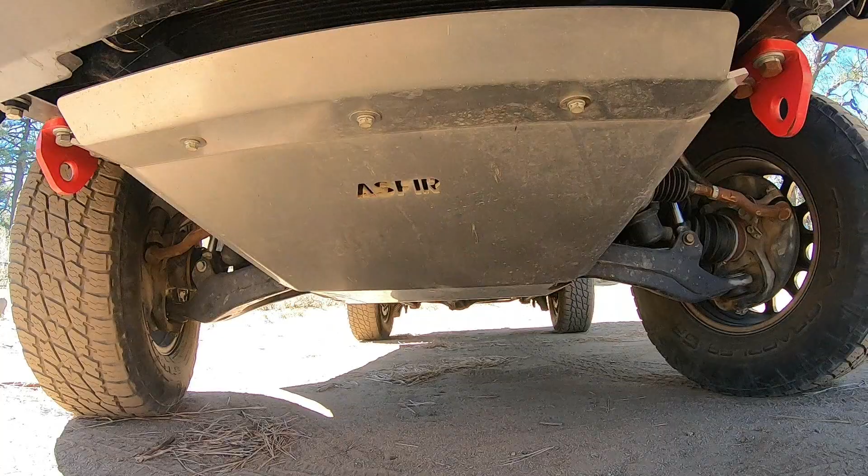We're going to be talking about Asfir. In one of my previous videos, I introduced to you the Asfir skid plate that covers the very front of the vehicle, right from the very front bumper to about where the diff drop is at. And that right there replaces that flimsy fiberglass/plastic skid plate, and it replaced it with a nice 1/4 inch thick aluminum plate with all the proper bends.

So today we're going to install and do a little review on the Asfir gas tank skid plate for the LX470. Now, I know right now, if you're watching this video, you're wondering, hey, is this also going to fit the 100 series Land Cruiser or the Toyota brand? And right now, I don't know. You'll have to check on their website often. I know that they have a prototype in the works, but this one was fitted to a Lexus LX470.

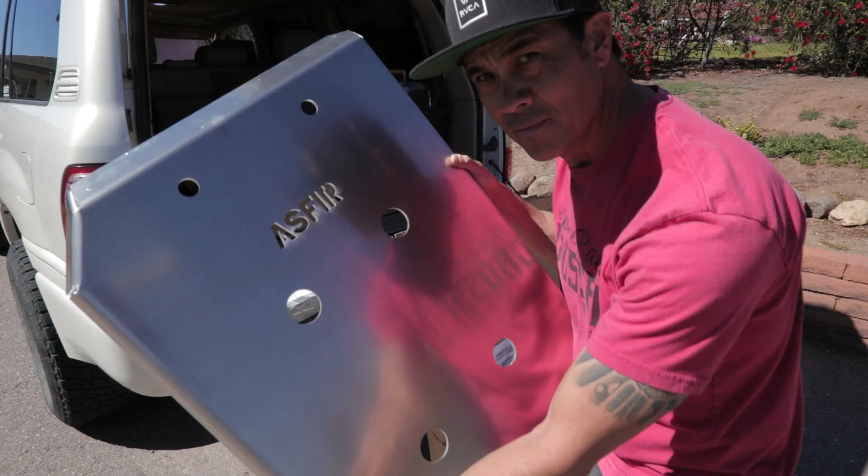Let me show you what came in the box. So what came in the box is some of the boring stuff. Sticker, although I'm pretty excited about the sticker. And then of course, instructions and hardware. Now, the skid plate has all the proper holes for mounting, all the proper bends to fit your LX470 gas tank. Now on the product list you have three different types of spacer nuts, and then you have some pocket washers and bolts.

Now this plate right here is also made out of 1/4 inch aluminum. It weighs 22 pounds, and the instructions will give you all the specs on size as well as where to put those spacer nuts. So let's crawl underneath there and take a look at what we have right now.

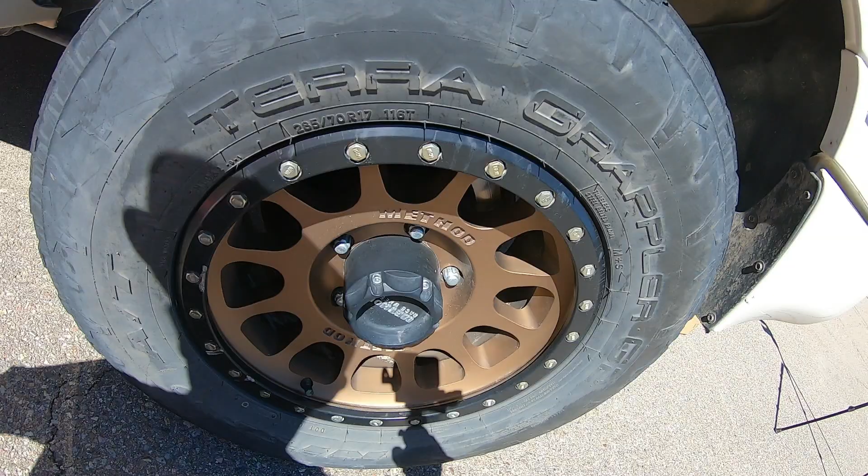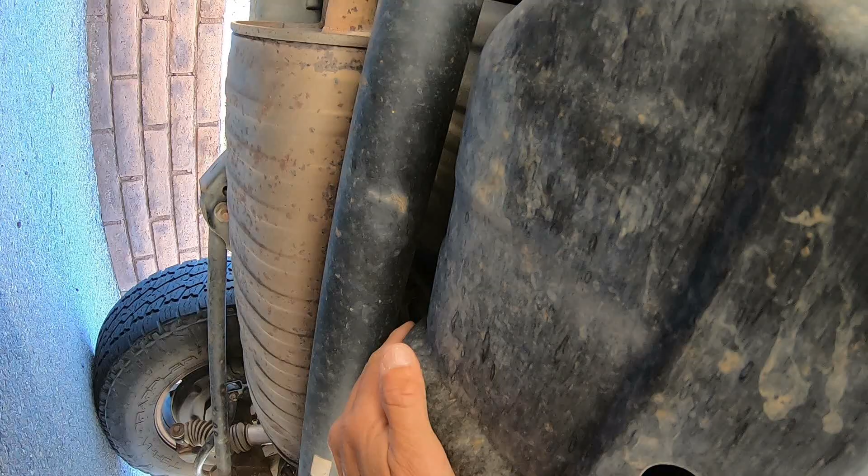So your gas tank is located right below your left rear passenger door on the driver's side. This skid plate is made out of a thin steel, and I've actually heard from some people that if they live in an area that has lots of moisture, snow, or they salt the roads, this could potentially rust out. Essentially what we're going to be doing is taking the Asfir skid plate and attaching it to the existing skid plate that's in place. We'll be placing the spacer nuts in these drain holes shown here.

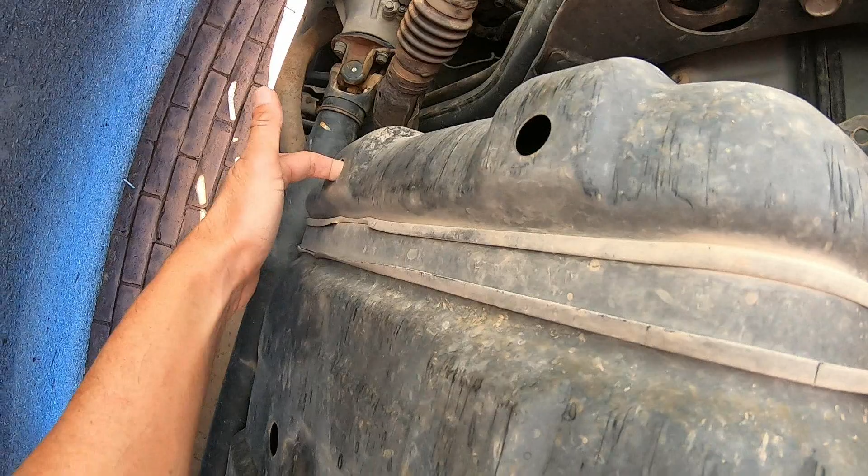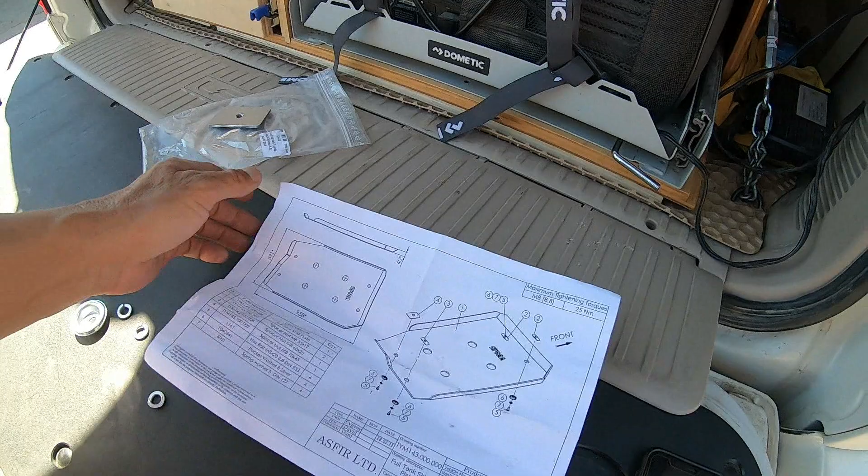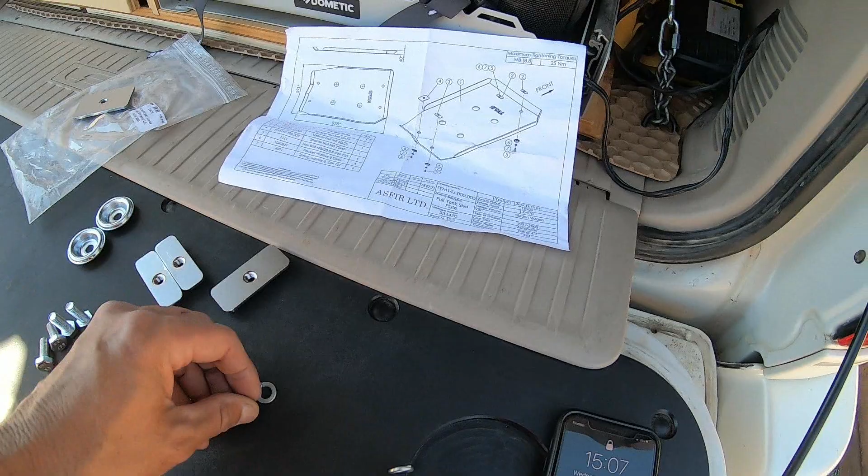So this isn't necessarily an instruction sheet. I figured that Asfir will probably come up with some sort of instruction sheet, but this is just a parts list, and of course it'll tell you about the size of the bolts as well as what to torque them down to. The parts list is that you're going to have these pocket washers, these split washers, 4 of them, 4 bolts, as well as these different size spacer nuts.

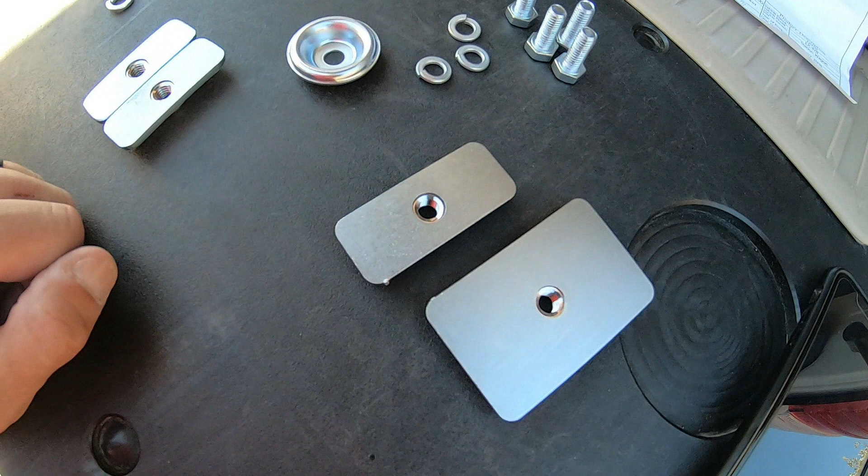So these two are going to be on the front of the skid, and then you'll have these two on the back side. And you'll see the corresponding holes in the back of the original skid, not the Asfir skid, which these two will go into. So let's go on down there and see what we can do. Shouldn't take too long to do this install.

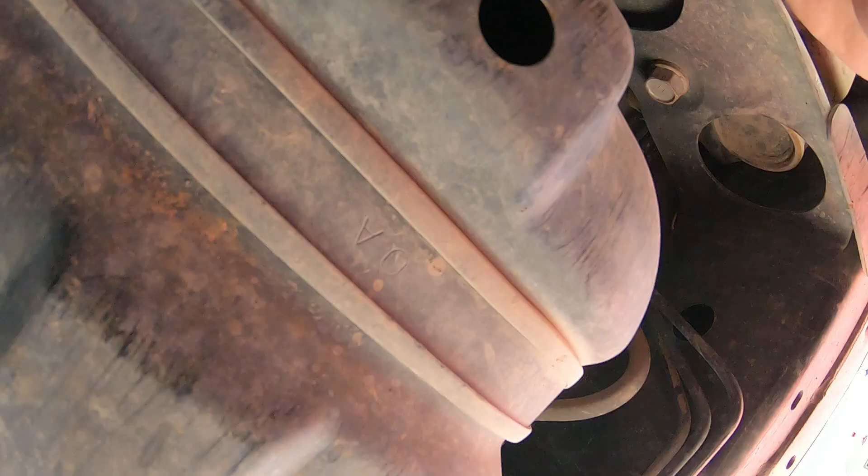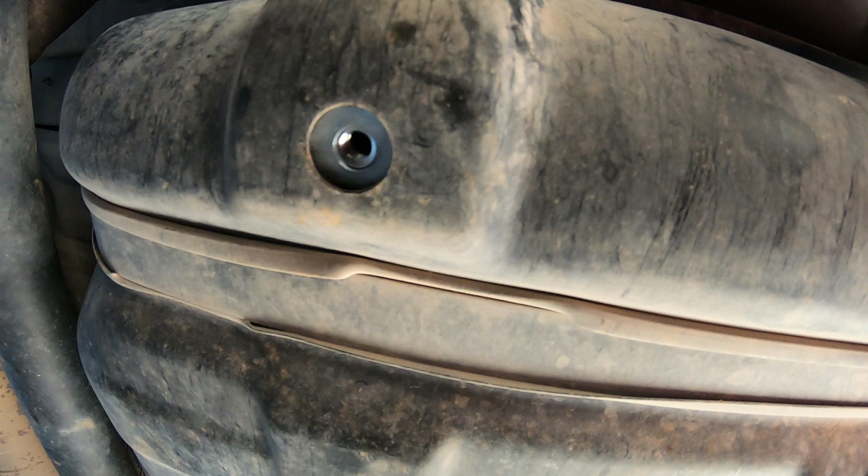So here's the front, and what you do is you feed this in here. It's got to go in there. Just look at that. So this one went in, and it's tight. It's kind of hard to do with one hand here, but essentially what I did is I put it in, kind of wiggled it around, because it's a tight fit, and you want to make sure that the flat portion is flush.

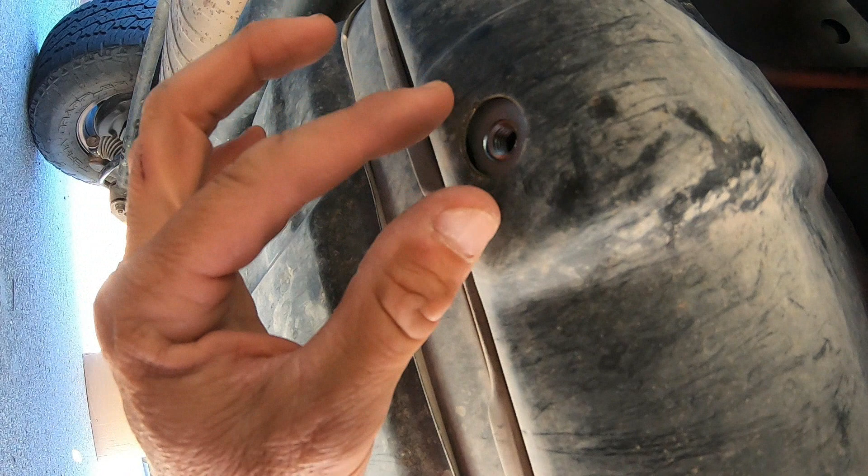You want to make sure this flat portion is flush with the hole, because when we put the skid plate up, we're going to try to lightly get the bolt to catch, and then once it catches, we can tighten it up. Get the bolt to catch, and then we'll tighten it up. So now, oh, there it goes.

And what you do is you'll get your finger in there and try to pick it up and turn it so that it'll get flush, because you want it to go with the wires. You don't want it to go this way because it'll stand up. But there it is. Now it's nice and flush and it's centering the hole. The back two were the easiest ones because they're much bigger.

So let's go get the skid plate on the jack and we'll put it right up on top. So tools for the job are a 3/8 ratchet with a 13mm or 1/2 inch socket and a creeper, as well as a floor jack.

A second pair of hands would actually work probably too. Now what the floor jack is for is that we're going to place it on this so that we don't have to hold it in place. A rag of some sort to lay on top of your floor jack. You know, I don't want the skid plate to get dings and dents prior to taking it on the trail to get dings and dents. I know it probably doesn't make sense to most, but I try to keep it all nice and neat. So big side to the front, little side to the rear.

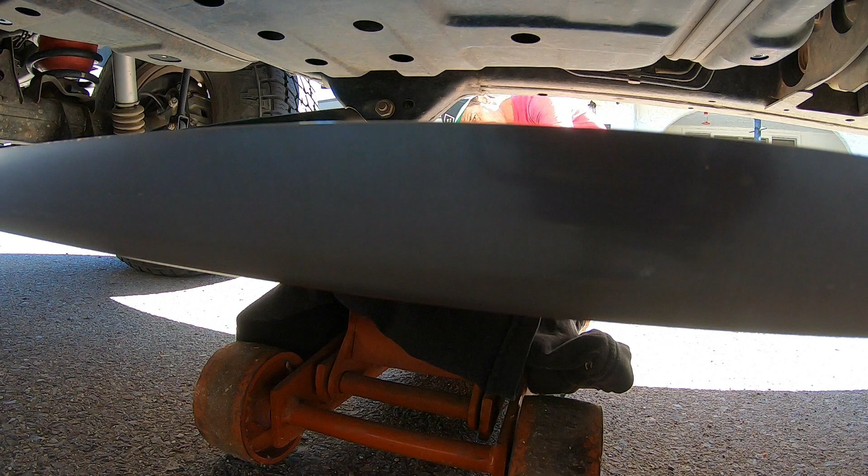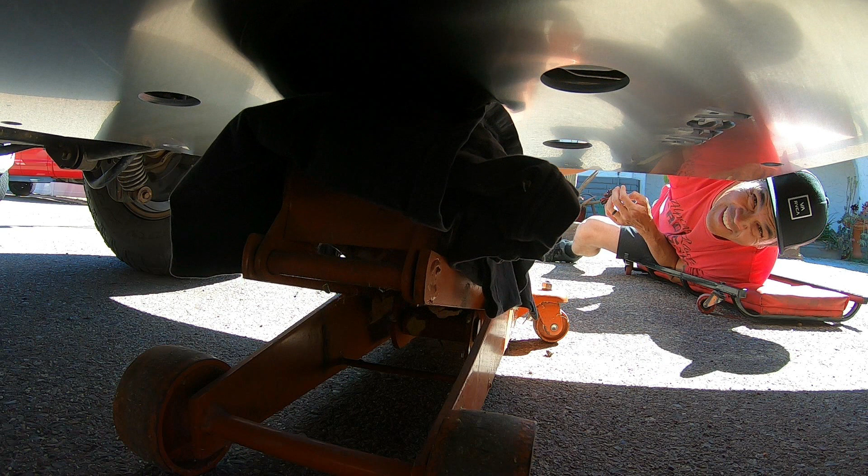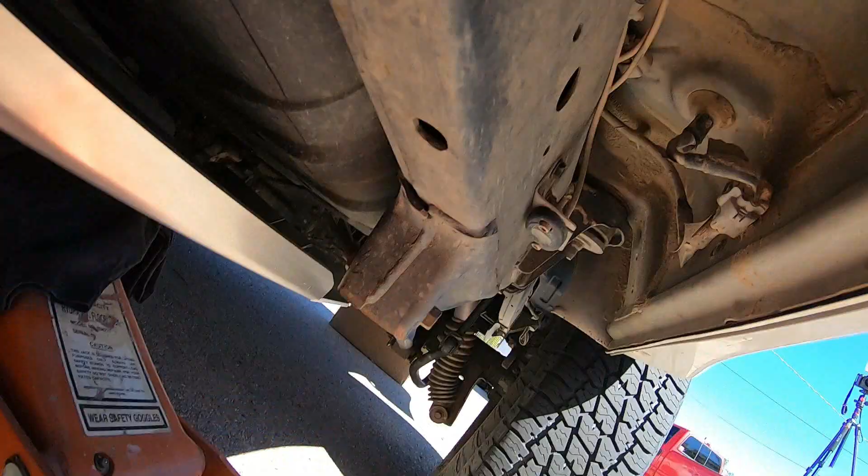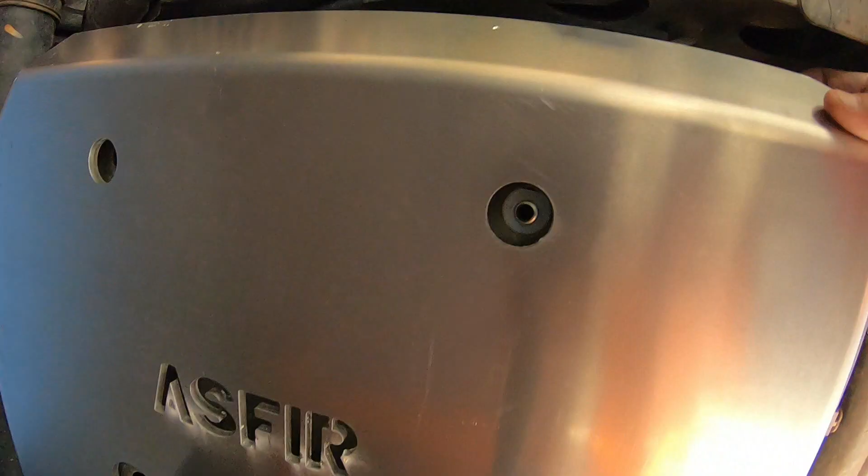So much easier with the floor jack. Now you'll notice that you have hardware here, right? And so this is gonna have to go up, snug up against the gas tank, and then move it back over, just to get proper alignment. Just up like that. So let me get the bolts and we'll get that all tightened up right there.

So if you notice that, you got to really just kind of get the thread started and then lightly twist it so you can tighten it in there. So I'll show you on the next one too. It's really just about catching those first few threads, and that's kind of a nice little setup. I like how these deep cups fit in there.

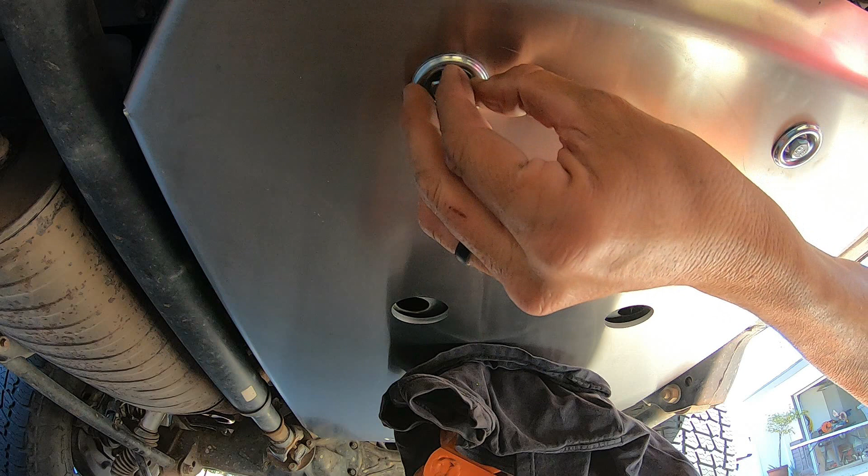So 2 hands is definitely where you want it. All right, one to hold the deep washer, and then that gentle hand to get the thread started. And you'll know when it's in because the bolt's not falling out, so you should be good. You know, if I ever say, hey, it should be real easy, don't ever listen to me.

So it's only 4 bolts, right? And you have those deep washers that go in there, but I'm pretty certain that things that have tight tolerances are supposed to be a little rougher to install. So this definitely has a tight tolerance. I have one more bolt to put in.

When you install this, definitely do everything really loose. Get everything inside. Use a floor jack to actually lift it up there, and then tighten everything. I thought everything that I had was loose, but it really wasn't all that loose. It really should only be a couple threads holding each one, and then tighten them up.

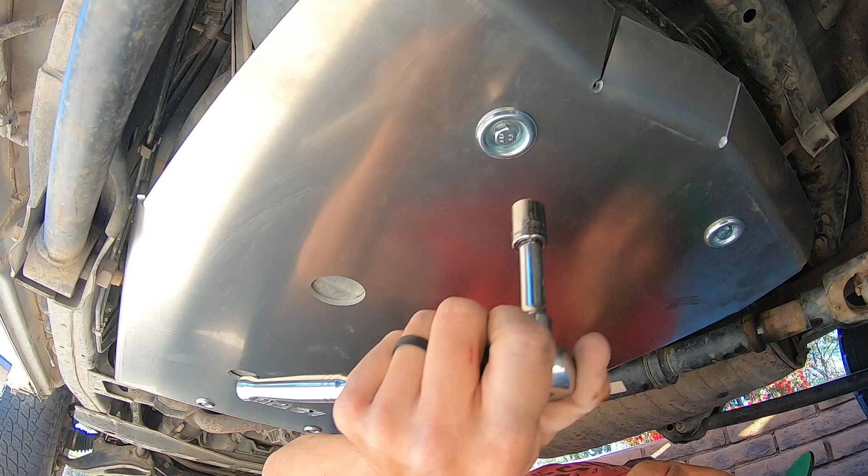Right now I have one bolt left over, and I'm going to use the floor jack to push that up into a position where I can get the nut on. And then we should be good. 25 foot-pounds, or a snug and a tug. Has a lock washer in there.

Wow, that looks good. Looks really good. It's flush. A nice little gliding surface for boulders.